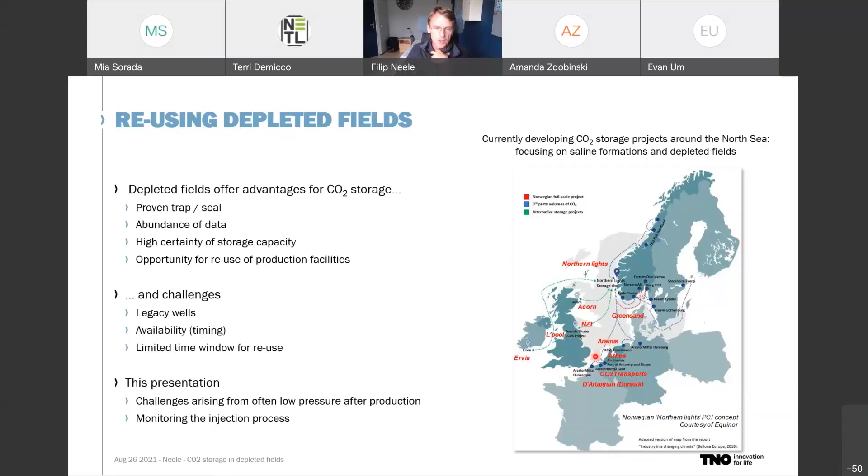If I go to the next slide, I'll be zooming in on the Dutch part of the North Sea, focusing on the coast, the Netherlands, the Dutch coast, which is about here. This is part of the Dutch offshore North Sea region.

So we have about 100 gas fields that are potentially suitable for CO2 storage, and together they have a storage capacity of about 1 gigaton. That's great, but then the question is, how should we develop these fields? How do we get the CO2 into the subsurface in a safe way?

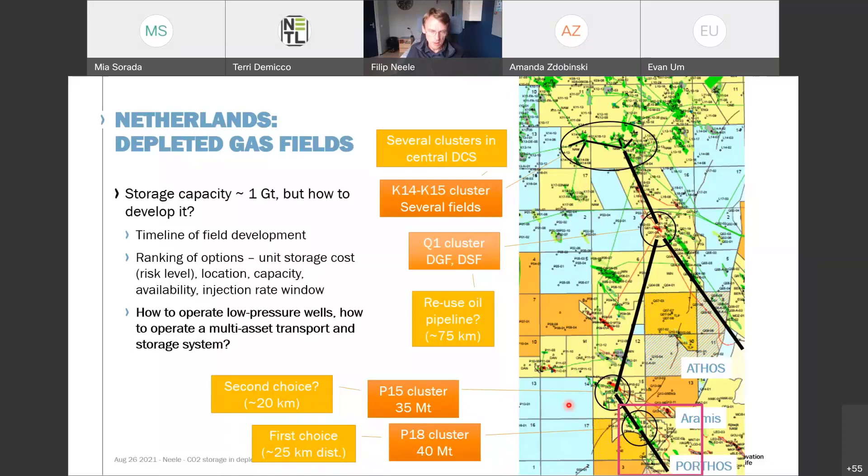Further up north there's quite a bunch of fields, representing the larger storage capacity. This could be what is constructed over the next 10 to 20 years. At the moment, the only certain development is enclosed in this square here at the bottom, and on the next slide I'll further zoom in to this area.

This is where we see the Rotterdam harbor with all of the industry located in this whitish zone. Currently the Porthos consortium is developing the Porthos CCS project, which connects the industry here to this offshore cluster of fields, the P18 fields, that have a storage capacity of close to 40 megatons. It's connected to Rotterdam by a high-pressure offshore line and a low-pressure onshore collection network, like here.

There will be a compressor near the coastline that converts low pressure into high pressure and then feeds the CO2 to a platform right here, where there are 3 to 4 injection wells that connect to this storage capacity.

The timeline is for the final investment decision, so the decision to go ahead and construct early next year, so as to be able to start injection by 2024.

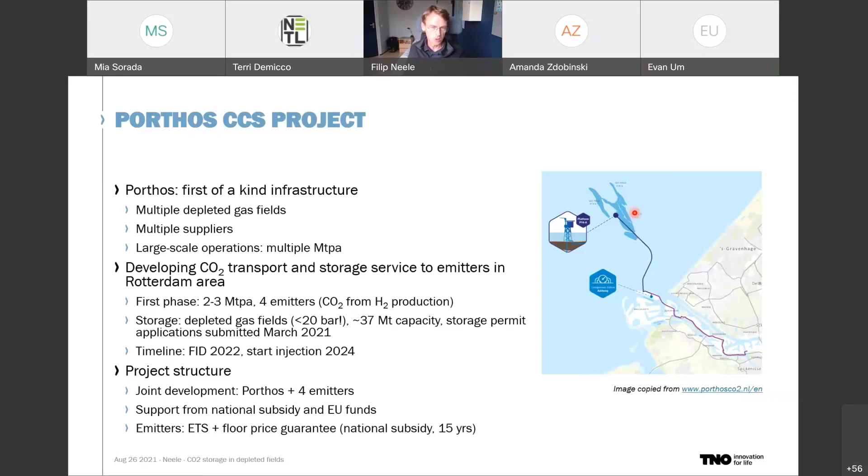So let's have a look at how to use a depleted gas field for CO2 storage. Let's get down to details right away, and look at the implications of the low, to sometimes really low, pressure in the field after production.

So the problem lies in bringing the CO2 from the high pressure surface transport pipeline to the low pressure in the reservoir. Our reservoirs tend to be at pressures between 10 and 20 bar at depths of 3 to 4 kilometers. This is because the aquifer connected to the reservoir is usually small in volume, so pressures tend to remain low after production.

You will know that bringing CO2 from high pressure to low pressure induces a temperature drop, and it's the management of this temperature drop that is causing headaches. So what we're looking at is basically temperature limits in the system.

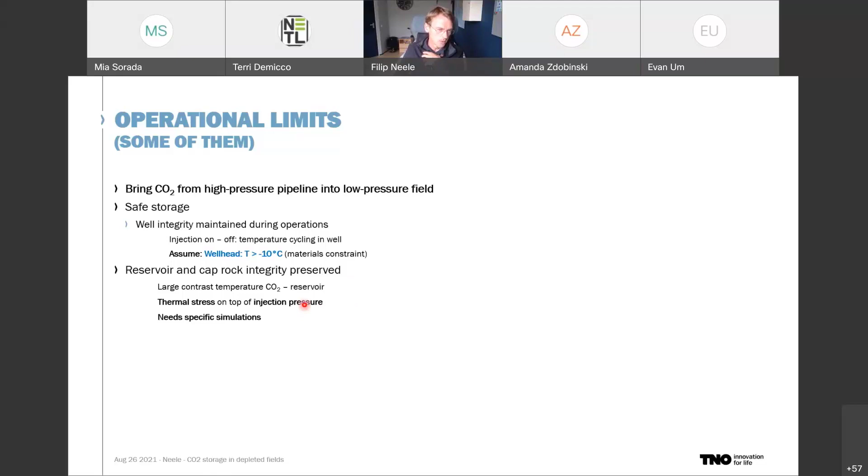Of course, we also have to worry about the reservoir itself and the caprock. We don't want cold CO2 entering the reservoir to bring into peril the reservoir and caprock integrity. We have to worry about that, but I will not talk about that here. This needs specific simulations to know when temperatures in the fields are going to pose an issue in this respect.

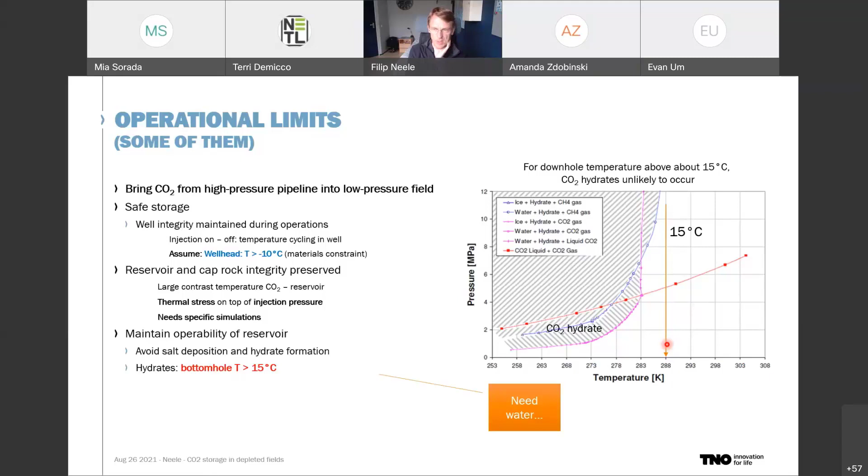So we now have two temperature limits that I'll be using in the following slides. Of course, there are additional limitations. You cannot inject unlimited amounts at unlimited rates in a well, so there's a limit due to erosion or vibration. But again, we'll not look at that here.

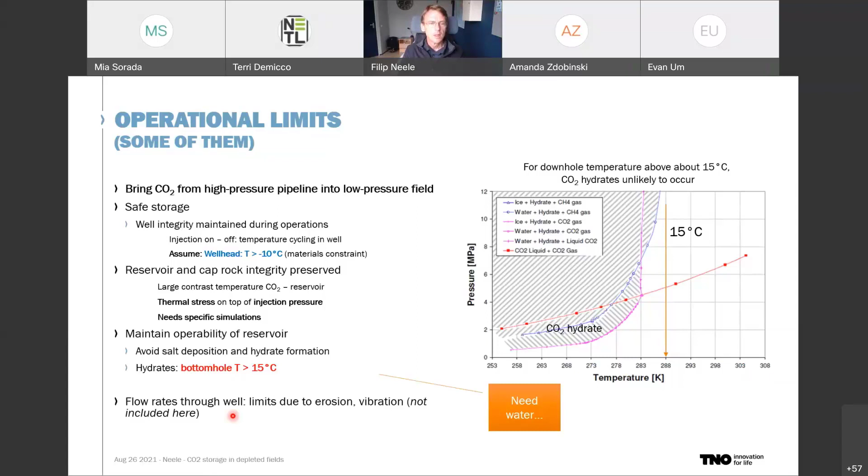So I have two wells for you. The first one is a flow controlled well. In this case, the well is connected to a pipeline with a mass flow control valve. You will be wanting to have such a valve, which basically is a means to control the amount of CO2 that flows into a well, because in a network with several wells, you will want to have some control over where the CO2 is going.

So we have a valve at the top of the well that we can close a little bit. The well is 3,500 meters long, about 3.5 kilometers deep. At the wellhead, we will look at mass flow rates between 10 and 170 kilograms per second. Pipeline is at 100 bars, so we have liquid dense phase CO2. The wellhead temperature of the CO2 is 10 degrees centigrade, basically seawater temperature. And at the bottom of the well, we have this depleted field, which is at a low pressure, at a high temperature, and again at this depth, over 3 kilometers.

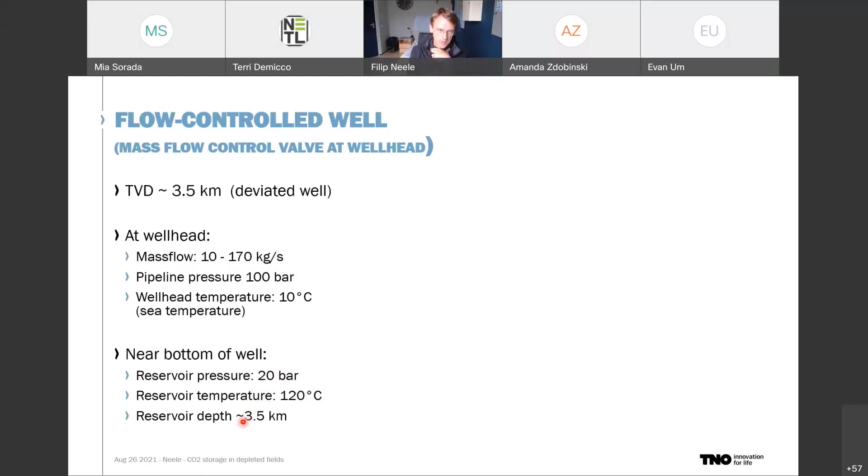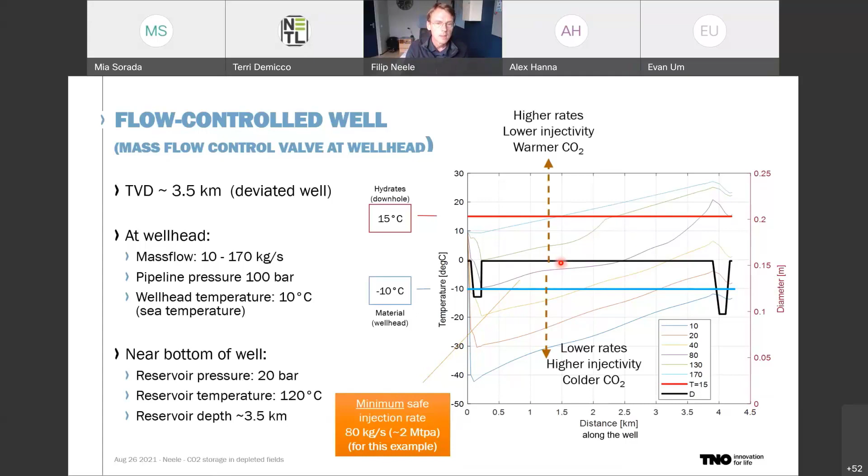Let's have a look at the second type of well, which is a well that's always open. So there is a choke or a valve at the top of the well, but in this case, the valve is always open, and we try to regulate flow into the well by changing the conditions in the pipeline.

Because decreasing the pipeline pressure will also give us lower rates, and maybe that is a good way to get rid of this problem of high minimum flow rates.

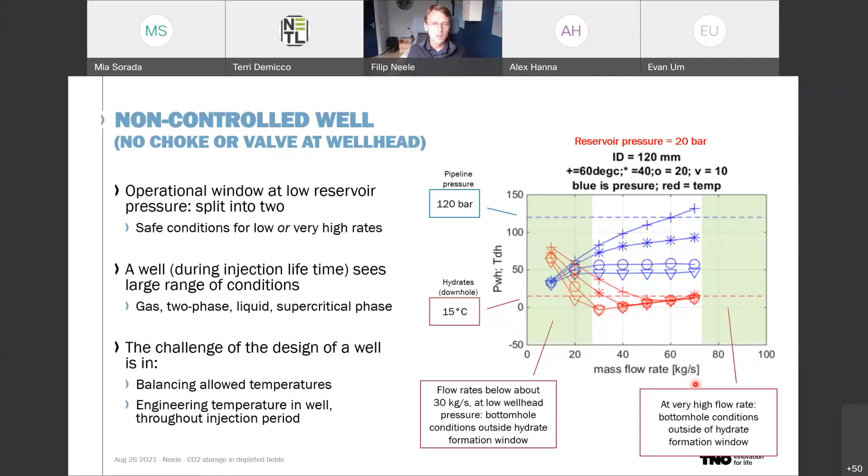So this was all talking about steady state conditions, and I did show you in the previous two slides that there are conditions in the system we can define in which we get feasible or admissible conditions for steady state operation.

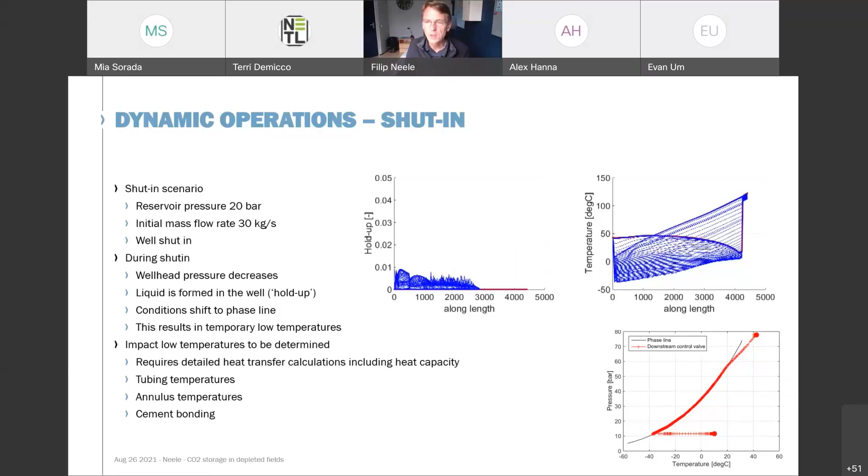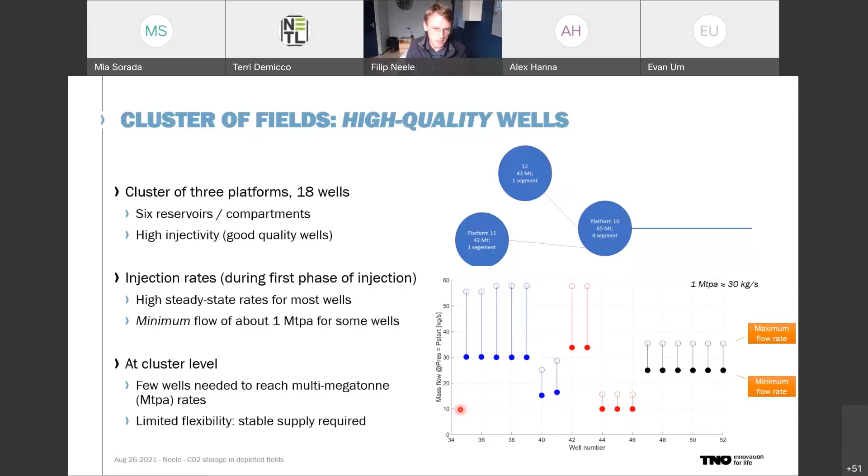So the operator of this particular network, even though he needs very few wells to run a network at an industrial scale, there are limits to the flexibility of this network. I'll skip this.

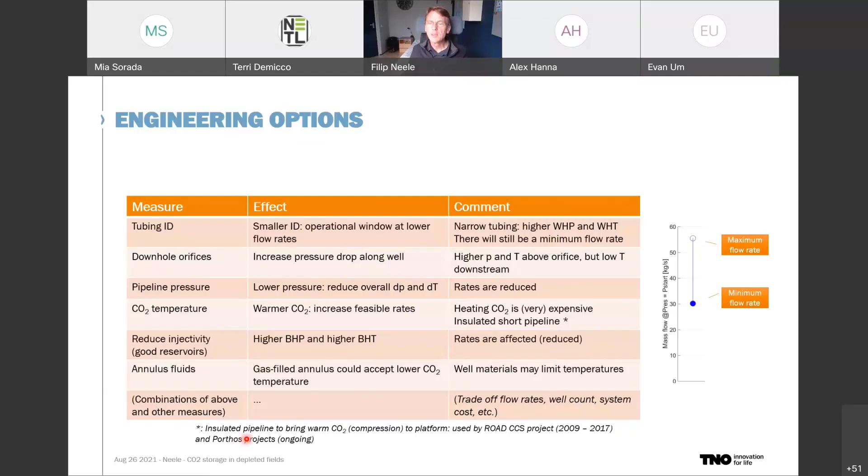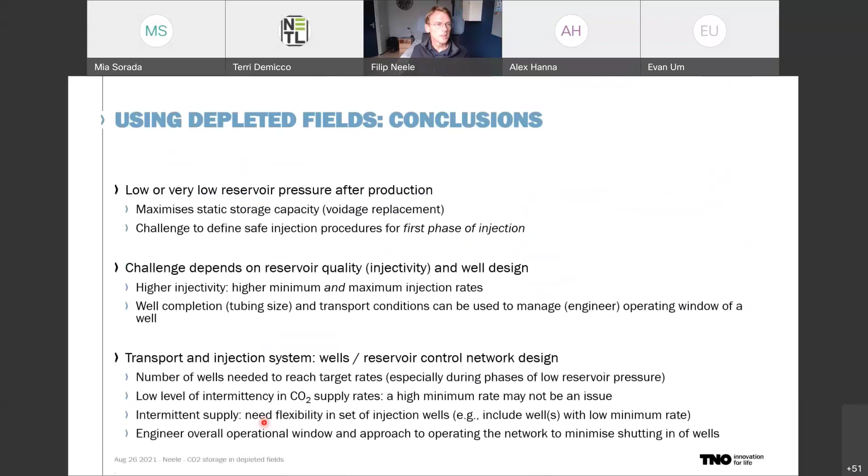I see that my time is running out. I had some more material that talks about further interesting limits, but I'll skip all that. I'll give you some further reading. Of course, the presentation will be made available to you. And with that, I thank you for your attention.

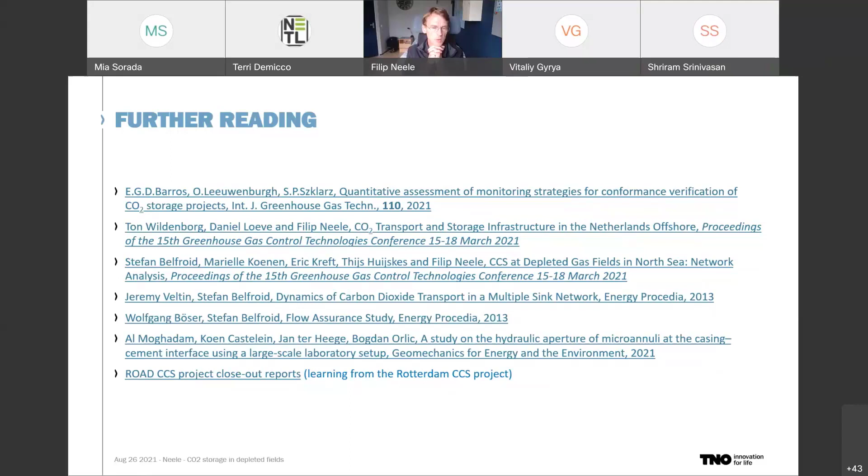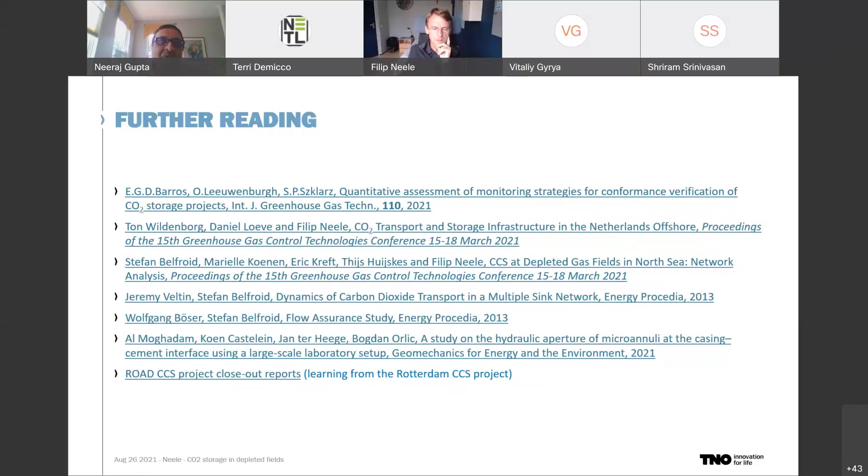Filip, thank you, this is Neeraj Gupta. I have a question on depleted reservoirs overall. It seems like there are design and engineering issues that can probably be solved at some cost, but did you see any showstoppers that would limit the use of depleted fields for long-term storage?

Not yet. That's not to say that I expect to find one tomorrow. What we did find is that as you dig deeper, like we have done with the Porthos Consortium, and start looking first at steady state scenarios, you find issues. You solve them by going into safe domains. Then you have to go to the next layer, that of transients, and there you find new issues. So what we found is that by adding detail, we have kept finding new challenges, and up to now we have found solutions for them. I think the fact that the Porthos project is now preparing itself for FID means that everyone is sufficiently confident that the system can be designed and constructed and operated safely.

It is going to be a matter of careful management, careful choice and definition of injection procedures, and careful adapting of the procedures to the evolving conditions in the system. But I'm confident that it can be done. It's just that, yes, I'm still amazed by the findings that this seemingly simple and obvious storage option actually turns out to be a rather difficult one.